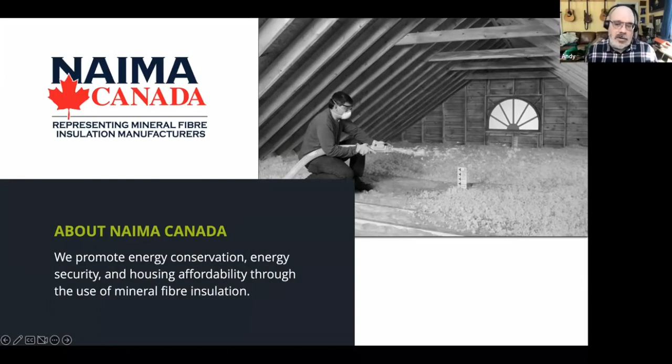NAIMA Canada is a nonprofit association representing mineral fiber manufacturers in Canada and North America. Our primary mandate is the promotion of energy conservation, energy security, and housing affordability with the optimized use of mineral fiber insulation. And we also touch on the periphery of things that are in that same category; really, building envelope is what we're very much interested in.

Today, Gary and I are opening the conversation about how we are going to build our way to net zero. How are we going to get there? The construction and renovation industry have been tasked with meeting lofty targets. All new construction is set to be net zero by around the early 2030s, while the energy performance of existing buildings is going to be part of future iterations of code, and we'll talk a bit about that.

The umbrella theme for today's session is translating how those targets are going to work in tactile elements. We'll talk about our top priorities and concerns for retrofits, how we're going to conserve energy, reduce emissions, and increase the overall comfort and long-term health of occupants. We'll touch on how some buildings will be challenging in our quest to reach net zero. And finally, we'll have a look at some examples of projects that have attained high performance through energy retrofits.

Something you may hear talked about from time to time are these buildings that are known as energy pigs. And I think most of you will recognize them around the country as you drive about. These range from 100-year-old farmhouses and homes that have not been upgraded. They have mechanical systems that are substandard or at least out of date at this stage. Those are the ones that are going to be first on the list to try and get fixed up.

So the other thing that you'll see from time to time is buildings will be divided up into pre-1980 buildings and those buildings that are built post-1980. The reason for that is because in Canada, we have approximately 14 million houses on the ground. Half of those houses are pre-1980, and the other half are post-1980.

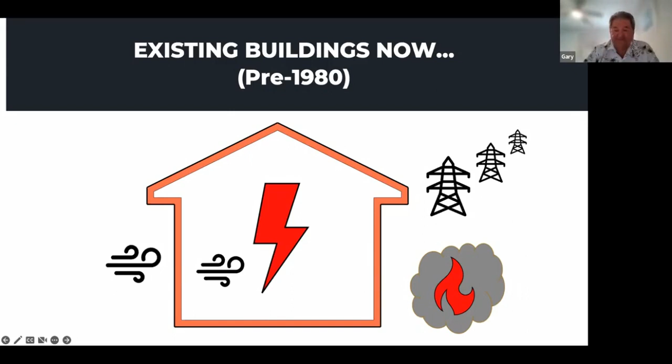As I mentioned, the mechanical systems may be low in terms of efficiency, somewhere around 50 to 60%, and they may be fired with electric baseboard heaters and that type of thing. So where do we want to go with these? We want to be able to take these things to net zero ready.

So we know from the work that has been going on with the Canadian Home Builders Association, they started a program in 2017, where builders were invited to build homes voluntarily to meet the net zero or net zero ready standard. Some of the things that we are seeing there is R37, for example, in the basement walls, R10 under the basement floors, R35 to R40 in above grade walls, R60 plus in the ceilings, and triple and quadruple glazed windows,

and air tightness of less than 1.5. Many of the builders are trying to get air tightness down to 0.5 if they can, to aid with the performance of the house. The other thing that we're moving towards is getting rid of fossil fuel burning appliances, and specifically furnaces. So oil furnaces and natural gas furnaces.

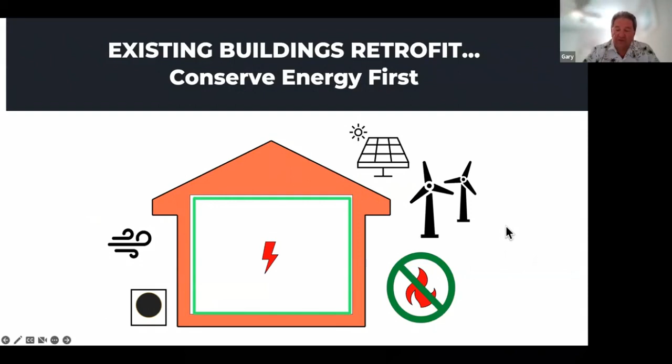The way we're doing that is by making the house so energy efficient that solar energy can be used to provide the power for that house. Alternatively, if the house is grid connected, we're looking for grid electricity that is non-greenhouse gas producing. So electrical energy that is coming from hydroelectric, nuclear, or coming from wind turbines or solar. And this is back over to you, Andy.

Yeah, and we're looking at what buildings are going to give us the most bang for our buck. This is kind of one of those pieces that we're going to look at today. Where is funding going to come from? And most importantly, how do we bridge that gap between government mandates and boots on the ground? Translating it so that the people that are actually executing the work are able to do so with confidence.

Looking at those, like Gary mentioned, the buildings older than 1980, those ones are going to have the most impact. Looking at also things like multi-units, those 2, 3-story, 4-story buildings that might have anywhere from 6 to 24 apartments in them that are relatively boxy and may have elements that we could correct and make them more energy efficient.

In terms of impact, community housing is one of the types of housing that will have the most impact for occupants, just because there will be more sensitivities and more health benefits in the long run for these people, but also it's going to be easier to operate and easier to maintain these buildings. And that says a lot when it comes to having community buildings.

And then lastly, the ones that are easiest to actually make energy efficient are the ones that are relatively boxy, cookie cutter shapes. And I'm thinking specifically here of post-war housing that came out just after World War II. Those were some of the first factory-built houses that ever came onto the market. And those ones are pretty much all the same size. We can get away with applying some industry-wide strategies to tackle those kind of buildings.

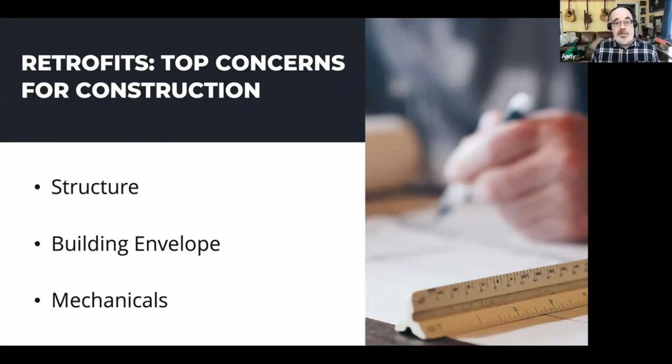That discovery might reveal problems with air leakage, insulation, or how moisture is managed, but the auditing process may also discover issues that supersede energy retrofit work, and Gary's going to hit on that a bit later. Creating a workable plan with mass energy retrofits is also going to run into some challenging conversations with building owners and occupants. How do you explain it so that they can relate to the need for improvements? This is where clear communication comes in handy.

Designers and contractors will have to focus on increased comfort and potential for better long-term health. The energy savings are likely going to amortize over 30 to 50 years in terms of payback with the building, which runs a little bit contrary to what we're used to when we perform alterations to our buildings. Tapping into that desire to save the planet is paramount, but we're going to have to be quite convincing when we're up against granite countertops and additional closet space. It's just a reality. We got our work cut out for us.

We're at a position where we have to ask ourselves, how are we going to gently disrupt the living and working spaces of millions of people to perform these energy retrofits? From a builder renovator point of view, we're really going to have to be aware and prepared to deal with all kinds of buildings in those situations. And I'll let Gary explain a bit more.

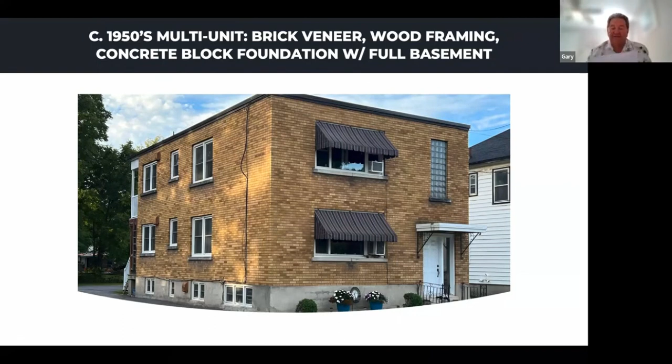We've got some flat roof again, and also coniferous trees there in the front, and I believe that there's some deciduous trees in the back. And the full basement with apartments in the basement as well. And this one, as you can see, this house, notice the high number of windows in front.

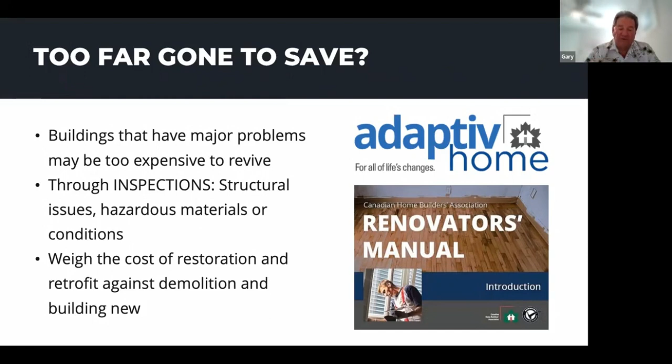Thanks, Gary. Gary brings up an excellent point here, and this is something that I think is worth mentioning. NAIMA Canada works closely with other associations; we're all aiming for the same goal. And so when we talk about this retrofit effort and getting to net zero, there are a lot of people involved. And there are a lot of really good resources out there, like the books that Gary mentioned.

And with that checklist approach in mind, there are some big hurdles to jump over when we court the idea of energy retrofits across the whole country. We're only going to get one shot at this because most of the work probably won't get another look for maybe 50 years or even more. So springing off the breakdown that Gary's provided, let's consider the major components.

Working from the foundation upwards, we'll need to ensure that the building and site drainage is functioning well for resilience and durability, and that the foundation is well sealed and insulated, especially as we future-proof our homes for what's coming down in terms of climate change or weather extremes or energy prices. And working upwards, the wall systems, openings, and extended parts of the buildings may need creative approaches when it comes to applying new control layers.

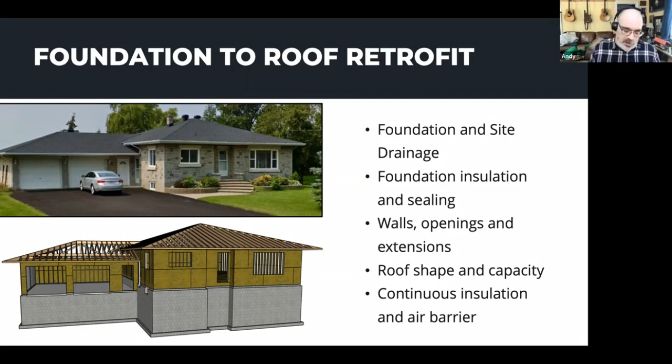If we set our targets to creating a continuous thermal and airtight barrier around the entire building, we could potentially reduce energy demands for heating and cooling. Speaking of other associations and initiatives, the prospect of retrofitting so many buildings has been on a lot of minds across the country.

And the people at the housing division at NRCan a few years ago created a system called PEER, and PEER is an acronym that stands for Prefabricated Exterior Energy Retrofit. In plain language, it means that they applied insulated structural panels to a building's exterior to create a new, more effective envelope. Now, there's a new initiative, a nonprofit group out of Nova Scotia called the Recover Initiative, that has spearheaded a campaign to bring the PEER panel method into the mainstream, capitalizing on already well understood materials and processes that contractors and renovators are familiar with.

Making this effort grow to a national scale might look like small or large shops in towns and cities across the country churning out high-performance retrofit systems and providing for local jobs and trades. We have proof of this because this sprouts off of an idea that came out of Europe, the Energiesprong initiative. And when you dive into the individual projects, getting more granular here, it quickly becomes apparent what type of management and orchestration will be required for many of these retrofits.

The spaces that we're working in will map out our logistics for us, whether we're working in a sizable yard with a driveway or on a tightly crowded urban street. We will need heavy equipment, delivery trucks, scaffolding, other equipment that has to be there in order for us to do this work. We'll also need adequate spaces for storing materials and parking dumpsters for waste removal, or better yet, for recycling metal, shingles, wood, whatever we can recycle out of a project. On some projects, there might be the need for weather protection, features that allow us to keep working through the rain and snow.

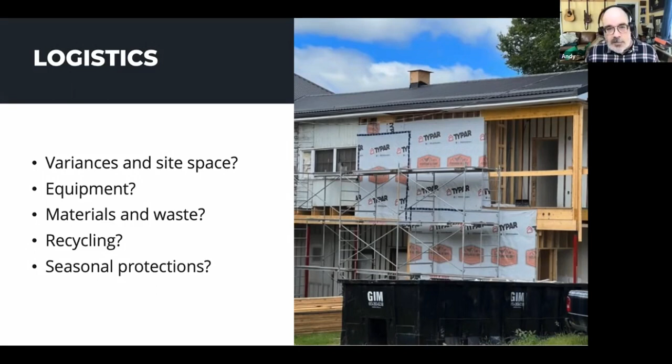The term industrialized retrofits is something to think about. It's a term that you're probably going to hear more often, and it implies a massive scale of work that is required, and industrializing it, making it a stamping kind of process. It goes through a factory. This level of project management is already pretty familiar in the ICI sector, the institutional, commercial, industrial, and developers are also familiar with this kind of process, and they could be an excellent resource and executor for this kind of project. And I'll let Gary explain what we're dealing with in terms of getting buildings to net zero.

So what's the main driver behind all this? Well, the Canadian government was part of the Paris Accord. And in that Paris Accord, they agreed upon a level of greenhouse gas reduction that Canada was going to achieve by 2030. There were sections for transportation, sections for buildings. For buildings, the way that we are looking to achieve our greenhouse gas reductions in new buildings is through the National Building Code. So the National Building Code now has tiers in it of improved energy efficiency. Every 2 years, for example, the tier will be increased until we get to 2030 or 2032. And by that time, all new buildings will be net zero ready or full net zero by the building code.

The existing building stock: Canada cannot reach its greenhouse gas reductions without considering those 14 million houses that already exist across the country. So we have to do something with that. So there is a code being prepared now called Alterations to Existing Buildings. The way that code is expected to work is that whenever someone requires a building permit to make an alteration to their building, it will trigger this code, and it will require the owner to improve the energy efficiency of that building. Now, will it be to the current code level at the time? We don't know that yet. It may be to a tier one level below the current code of the day.

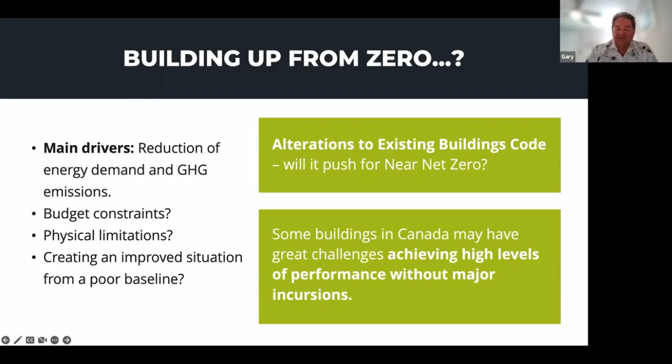So our view of this is that the next step for these buildings is to improve the insulation, the air tightness, the vapor management before addressing the mechanical systems. So if we look at a typical building, the lifespan of a house, for example, is typically 100 years. And that house will likely go through 2 or 3 major renovations over that period of time. So let's say the house is renovated at the 30-year mark, or the house is renovated at the 50-year mark. Well, the houses built in the 1980s, of course, would be coming up for that major renovation.

Insulation, air tightness, and windows and the like, these things tend to last for 30 to 50 years; insulation will last for the full life of the house. So it makes sense to do building envelope upgrades first, and then follow that up with properly sized mechanical systems. If you do the mechanical systems first, then you're delivering the energy required for that house in a more efficient manner, but the house is still using the same amount of energy as it was before the mechanical system upgrade.

We're seeing, at least used in new housing, cold climate air source heat pumps coming online, and this is part of a push towards decarbonization. So they're asking people as well to retrofit existing houses with these cold climate air source heat pumps. So removing a fossil fuel burning furnace and replacing that with an electrical powered cold climate air source heat pump. But it doesn't make sense to do that prior to upgrading the building envelope.

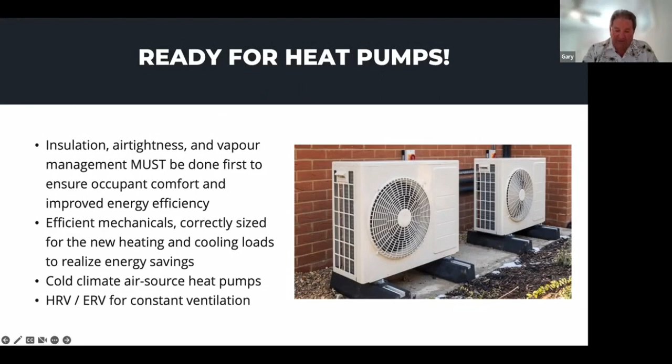The idea here is make your house heat pump ready by improving the building envelope, then put in a properly sized mechanical system. And of course, whenever a house is tightened, we want to make sure that that house has got proper ventilation for the people that are going to live in it. So high performance is possible. The existing building energy retrofits are challenging, but they're not impossible. And Andy is going to take a minute now and show you some of the things that have been done out there across the country.

Thanks, Gary. And it's inspiring to see the kind of work that I'll just briefly glance off of, because these projects are doing what we're talking about. They're bringing buildings to such a point where they can be powered mainly by renewables, or to the point where their building envelope, the insulation, the air tightness, the moisture management, windows and doors are doing such a job that they hardly need grid input, or they need very little input.